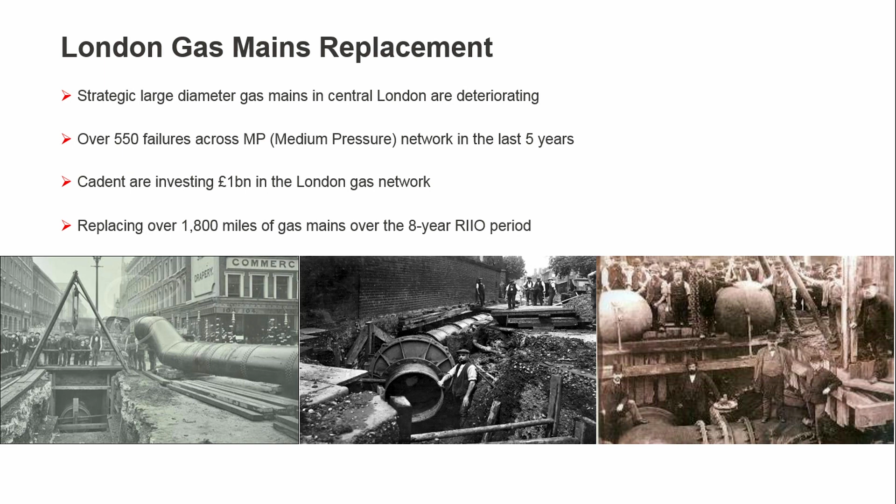A big part of Cadent's programme for the London mains replacement is the London MP Strategy, which is to replace the strategic gas mains running around Westminster, Kensington and Chelsea, to create a ring main from Fulham up to Hyde Park, back through Knightsbridge. We're also reinforcing the network south of the river, around Battersea and Vauxhall. We've replaced a lot of mains in the City of London and out towards Tower Hamlets along Commercial Road, all very heavily congested, high traffic areas, lots of disruption. It's really difficult work to do.

So why do we need a tunnel under the Thames? Cadent's got a small section of its gas network south of the river, a legacy hangover from when National Grid split up the networks and sold off to Southern Gas Networks, Northern Gas Networks and so on. We're reinforcing the network to facilitate the growth, regeneration and demand south of the river around Battersea and Nine Elms, where there's billions and billions of regeneration going on. Battersea Power Station, US Embassy, lots of residential, commercial, retail development going on south of the river, and they need more gas. The infrastructure there can't cope at present, so Cadent has an obligation to reinforce the network.

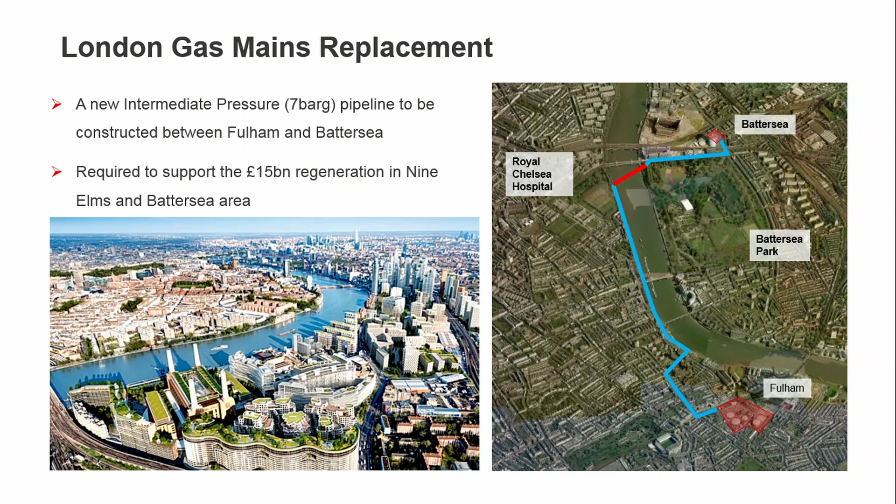So we undertook a study and identified that we couldn't get north to south river with the existing pipes that we had in place. There's an existing bridge crossing, Grosvenor Bridge, adjacent to Chelsea Bridge, which we see here.

Let's see if we get this to work here. So this is Chelsea Bridge. And this is Grosvenor Bridge, which carries all of the southbound traffic out of Victoria Station, a very busy railway bridge. Anyone who knows working on Network Rail infrastructure knows it's an absolute nightmare to get possessions and all that kind of thing. So to undertake any gas work on a Network Rail site, so to speak, was out of the question.

That was discounted. We also looked at the possibility of utilising other existing bridges, but as you can see here, they're all Grade 2 listed structures, and the local authorities wouldn't permit new infrastructure going on their assets. We also determined as part of the feasibility study there were some old steam tunnels north to south of the river going to Battersea Power Station, but we couldn't guarantee the integrity and condition of those tunnels, so we looked away from those as well. So we can't go over, that means we've got to go under.

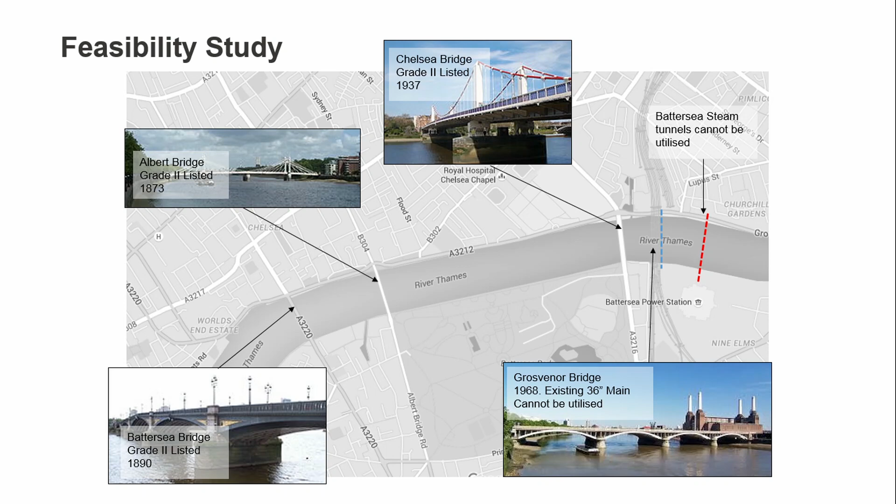Jacobs were commissioned back in 2012 to look at a route corridor analysis between Fulham, where the high pressure gas comes into this part of the network, and Battersea, which is where ultimately we need to get the gas to. The route corridor analysis identified a few potential options. It also identified Thames Tideway, which was obviously a big project that was planned, and it also identified Crossrail 2 potential, which had a safeguarded corridor there that we had to consider as part of our works.

From this feasibility study, we honed it down into 3 preferred options. I'll just talk you through these in a little bit more detail.

Option A runs from Chelsea Embankment Gardens through to Carriage Drive North in Battersea Park. The site on the north at Chelsea Embankment Gardens is a very slim, tight site, right next to Chelsea Embankment, a TfL strategic road with lots of traffic, and difficulties with access and egress into site. Carriage Drive North is smack bang in the middle of Battersea Park. So wherever we came out of the tunnel, we'd have to do an open cut trench to Queenstown Road, which is the road that you see here. Again, open cut for a large diameter main through a well-established, Grade 2 listed park wouldn't have gone down very well.

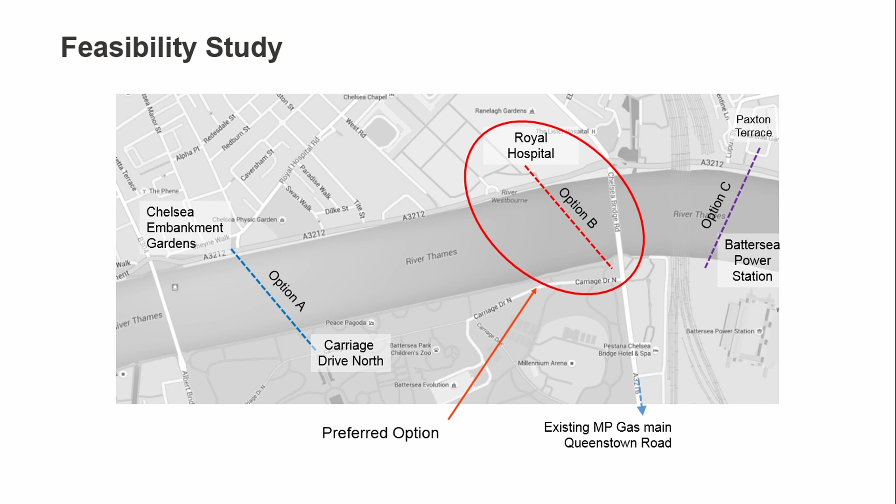If we look at this in a little more detail, it's been superimposed onto Google Maps, so you can see the general environment. We've got Chelsea Bridge here in the middle, and the alignment of the tunnel going north to south.

You'll see further on in the presentation that some of the site constraints, particularly around Battersea Park, were quite challenging, which we needed to overcome. And the Royal Chelsea Hospital, as I've said, hosts a national institution, the Chelsea Flower Show, which has been going on for over 100 years. The monarch attends every year, so factors like this we need to consider as part of the project.

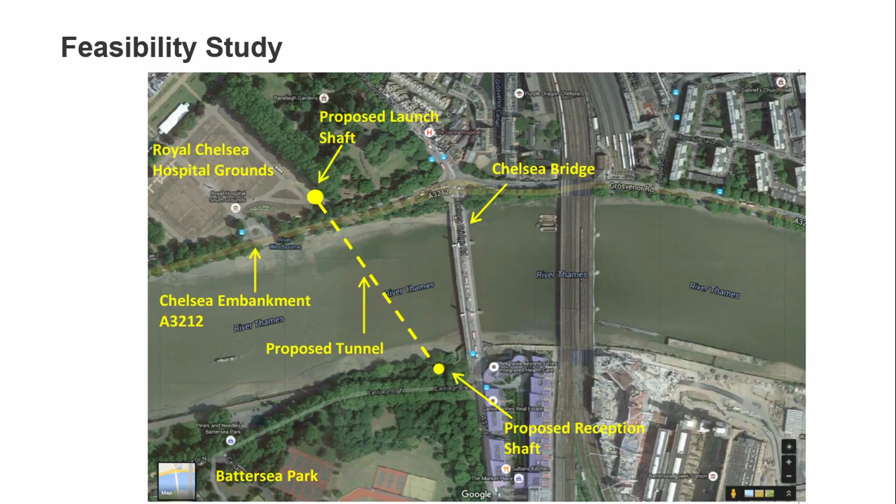In terms of team structure, Cadent and Trio have an 8-year partnership in place, but Trio replace gas mains and don't have capability within their core business to undertake heavy civil engineering projects. So Trio went back into the parent company, Skanska Civil Engineering, and we brought on board the project team, as you see here.

Mott MacDonald undertook all the design from tunnelling, civil engineering, and gas infrastructure. Skanska managed the shafts and tunnel construction with Barhale, and also managed all the site welfare, traffic, etc. Barhale were appointed directly to Trio as the pipeline contractor as well.

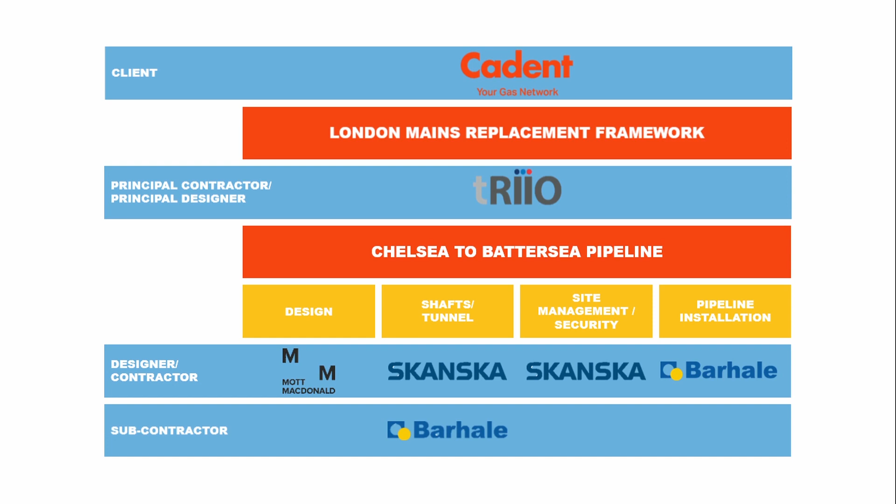Looking at things from a desktop feasibility study is great, but when you have to actually go out there and start speaking to the stakeholders and say, well, we want to come and do a dirty great big project in your nice manicured gardens, there's obviously some challenges around that.

For this project, there was significant stakeholder management, numerous consents and permissions to secure, a big interface with Thames Tideway and the Chelsea foreshore, and programme constraints. The condition from the Royal Hospital and the Chelsea pensioners was: okay, fine, you can come and do your work, but by no means can you affect the Chelsea Flower Show or the preceding events that happen over the summer. So these are the kind of things we had to factor into our project.

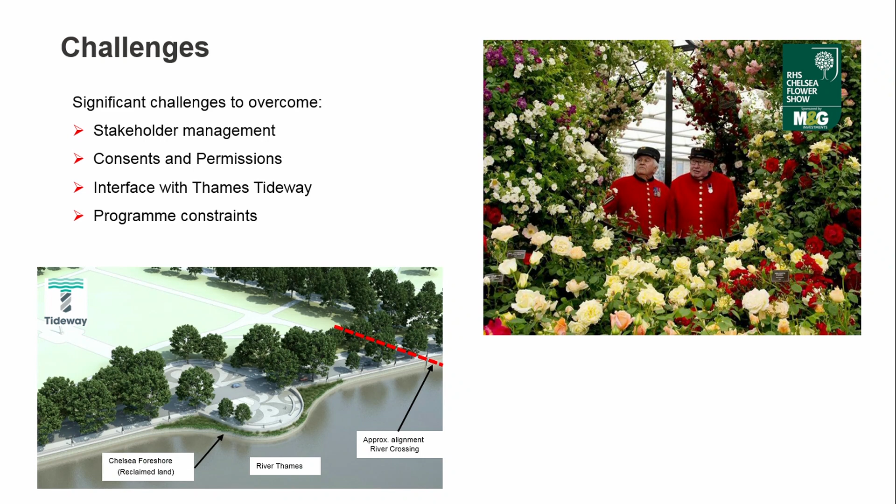They understood the drivers for the project, why we needed to reinforce the Central London gas network, secure infrastructure and gas supplies for Londoners for the 21st century, and through developing relationships with those stakeholders, we managed to get them on side for what is quite a challenging engineering project.

The RHS, to be honest, got quite concerned about the fact that we wanted to undertake major engineering works in the grounds of the Royal Chelsea Hospital. So they were quite a big stakeholder that we needed to manage carefully.

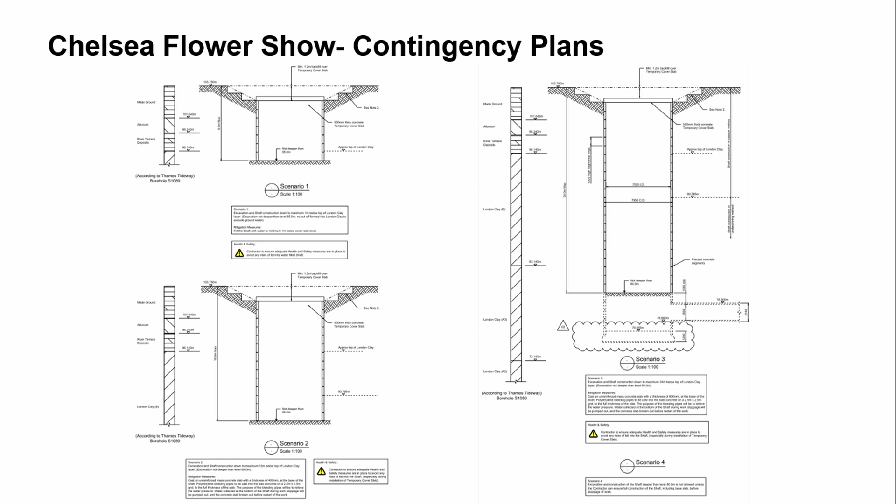Another big interface we had was with Thames Tideway. Obviously a big, major £4.2 billion infrastructure project with a development consent order and a safeguarded corridor down the centre line of the River Thames. Cadent had to agree through what they call the guidelines for developers process. Tideway requires anyone wanting to build next to or near their infrastructure to go through quite a rigorous process where we provide all our settlement information, which we'll talk about in a little while.

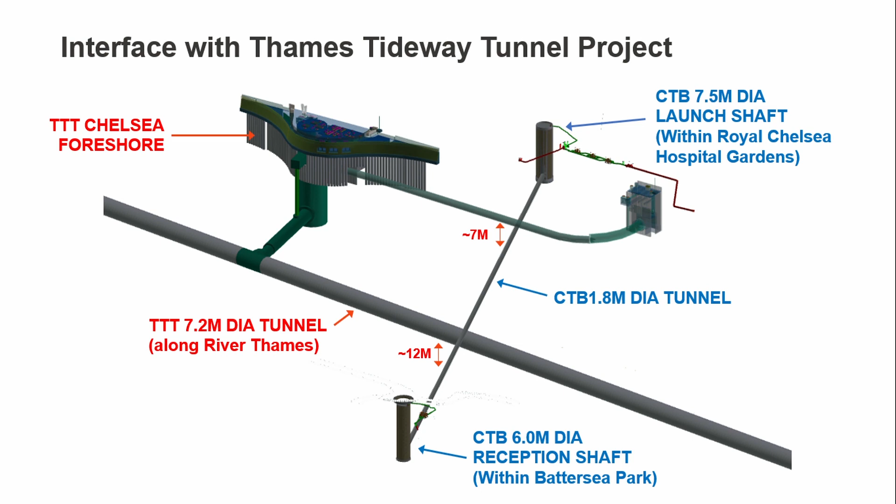Another benefit of coordination with Thames Tideway is the fact that we got to utilise their ground investigation information. So we had a massive programme and commercial saving in that we didn't have to mobilise our own GI barges in the river and so on to undertake boreholes which fed into our design. And as luck would have it, S1089 is bang where our shaft was going to be.

And the finalised layout we have here: 30-metre deep shafts, a launch shaft which is 7.5 metres diameter, a 6-metre diameter reception shaft in Battersea Park, and the pipe jack itself is 330 metres long, 1.8 metres diameter.

At the time of feasibility, we weren't sure whether or not we could get land agreed on the south of the river for some gas infrastructure. So the tunnel was actually sized to accommodate 2 gas pipelines, which is why it's so big compared to the 18-inch pipeline that was eventually installed - it was kind of over-designed for what we needed. And when we actually got permission that we could get the land, it was kind of past the point of no return in terms of the design, so we kept it at 1.8 metres diameter.

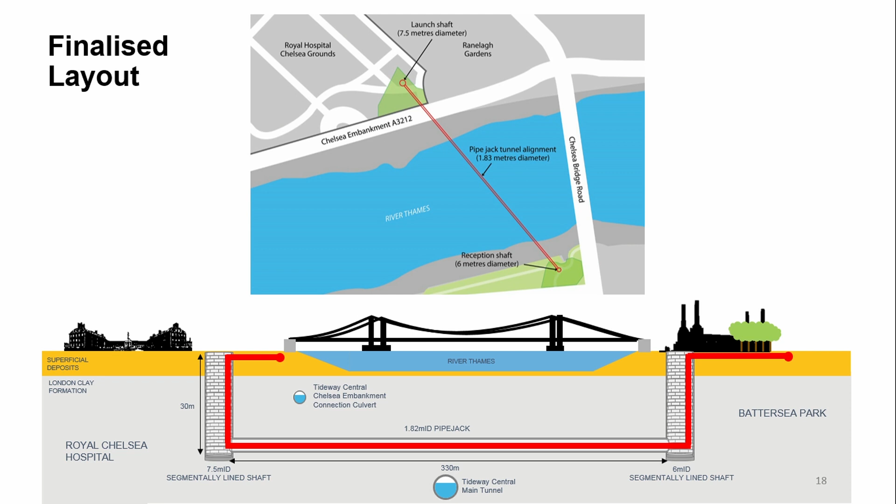And that's my first part over. I'll now hand you over to Nick to carry on.

Thanks, Andy. My name is Nick McCrossan, and I actually work for Mott MacDonald, but last year, in 2017, I went to the dark side and joined Trio, who are the principal contractors for the project. Over the next 10-15 minutes, I'm just going to take you through what made this project much more complicated than a normal pipe jacking project.

It was the constraints on both sides of the river which added to the complexity of the project. As Andy said, the works occupy either side of the River Thames, just north of Chelsea Bridge. We're in the grounds of the Royal Chelsea Hospital, and in the north-eastern portion of Battersea Park.

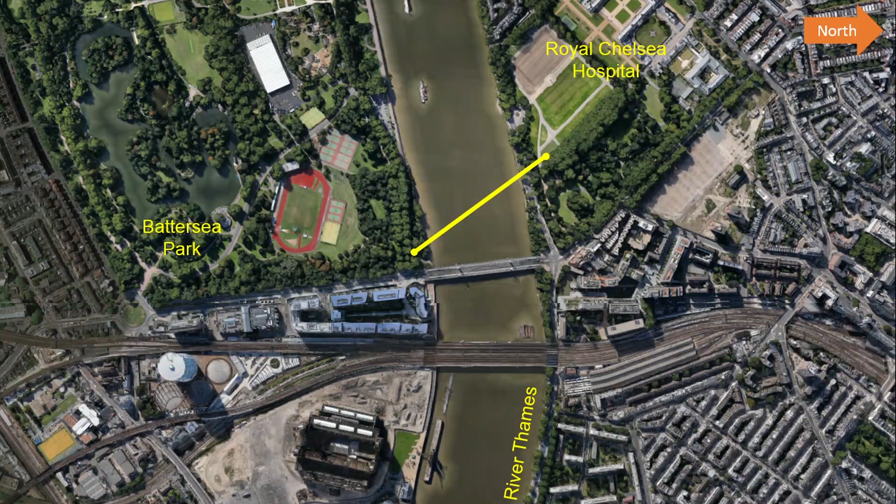So it might not seem like the busiest place in central London, but the amount of additional development work going on in this area is quite staggering, because you've got Battersea Power Station development to the east of our site, but you've also got the Northern Line extension feeding into that. You've got the Chelsea Barracks development happening north of the river, and you've also got the Thames Tideway development, as Andy mentioned too. In quite a small constrained area, you've got quite a lot of development, which obviously puts a lot of strain on the local transport network and the supply of resources and materials. So all these simultaneous and competing projects make things a little bit more difficult for us.

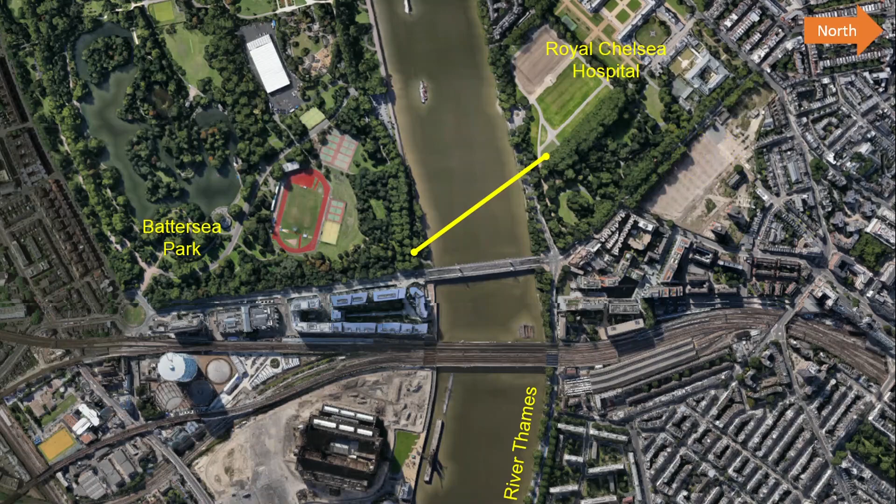So focusing purely on the Royal Chelsea Hospital site, which was our launch shaft, I'll go through some of the constraints. So the biggest one is you've got Tideway.

They're building an offline shaft just adjacent to the Bull Ring Gate at the Royal Chelsea Hospital, and they've also got an interception tunnel running from the Ranelagh Gardens into the shaft. So we had to coordinate all our works with them when they started on site last year.

You've got the TfL Red Route on the Chelsea Embankment, one of the major transport veins of London, which tends to get quite congested, making it difficult to get materials in and out.

We've got 2 key Thames Water assets running underneath the site, the Ranelagh sewers. For the duration of the works, we had to make sure these were protected, and we were measuring any kind of impact to them, which I think Verushka is going to go through in her section.

The hospital itself is a care and retirement home for over 300 ex-military personnel. So obviously we have to be very cognizant of the impacts that we have on them as a community. Especially when we went to 24-hour working for the tunnelling portion, we had to make sure we were minimising any visual and noise impacts as a result of our works.

And the grounds, as Andy stated, during the summer are quite busy with events such as the Royal Chelsea Flower Show, but also host things like the Masterpiece London Art Fair, and the Longines Global Champions Tour.

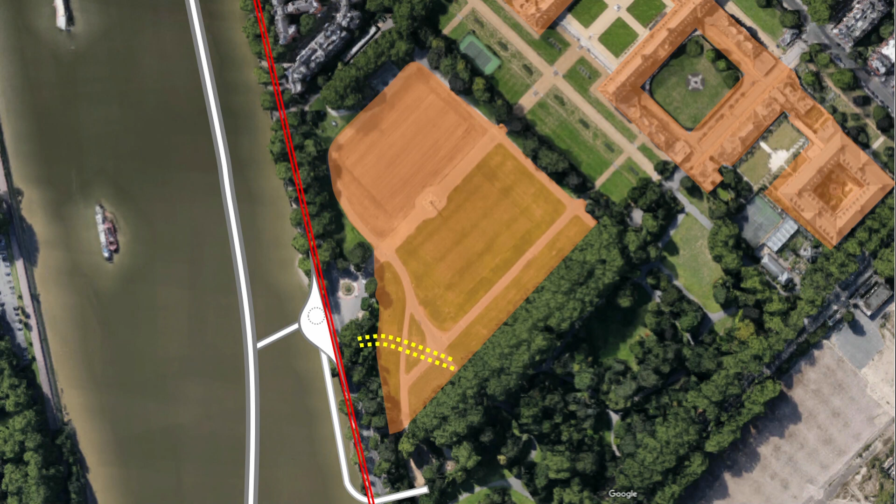What was actually quite a pleasant surprise was you would think that the hospital at our level would be quite stuffy and wouldn't be very flexible, but they were absolutely fantastic, and the residents themselves were very interested in what was going on, because you had ex-miners and ex-engineers who wanted to come down and offer advice and see behind the hoardings, and it was really good to actually get them out onto the site to see the works going on.

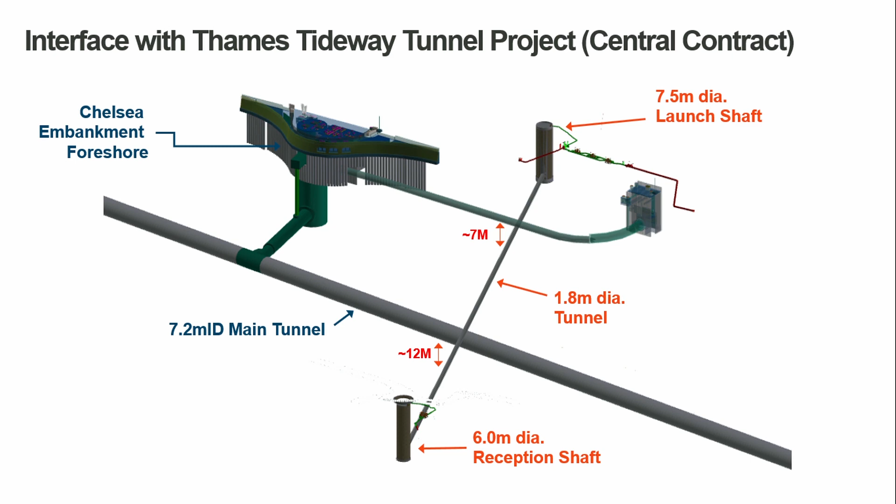As Andy mentioned, our biggest interface was with Thames Tideway Tunnel, so what was quite important is you don't compete with another project, you have to help each other deliver it. We had to make certain accommodations in the work we were carrying out at Chelsea to make sure that Tideway could complete their programme of works as well. That was one of our major considerations.

Taking account of the summer events had a major impact on our programme. For about 5 months of the year, Chelsea was out of bounds, we couldn't carry out any work. So we had a very short window in which we were able to construct a launch shaft.

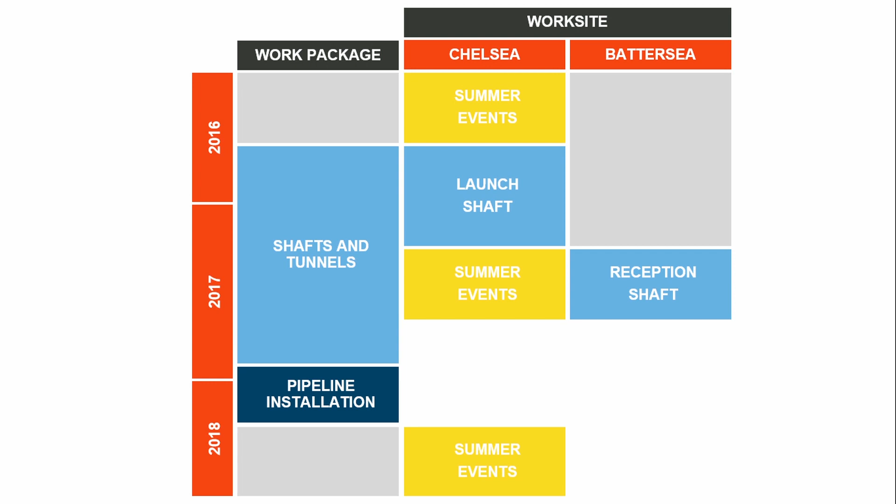Then in the 2017 summer events, we had to go over to the other side of the river, mobilise, build a reception shaft, and then we had a very small window last winter in which we could start the tunnelling and get the pipeline installed and tested and commissioned. So it's quite an intense and constrained programme we had to work to.

So we had to go from here, a fully mobilised site at Royal Chelsea Hospital with our cabins, our exposed shaft, all our plant materials, to a state where it was fit to hand over to the hospital for their summer events. So we installed a prefabricated cover slab made up of 12 planks, covered it over, backfilled the shaft and the ground and handed it over to the hospital.

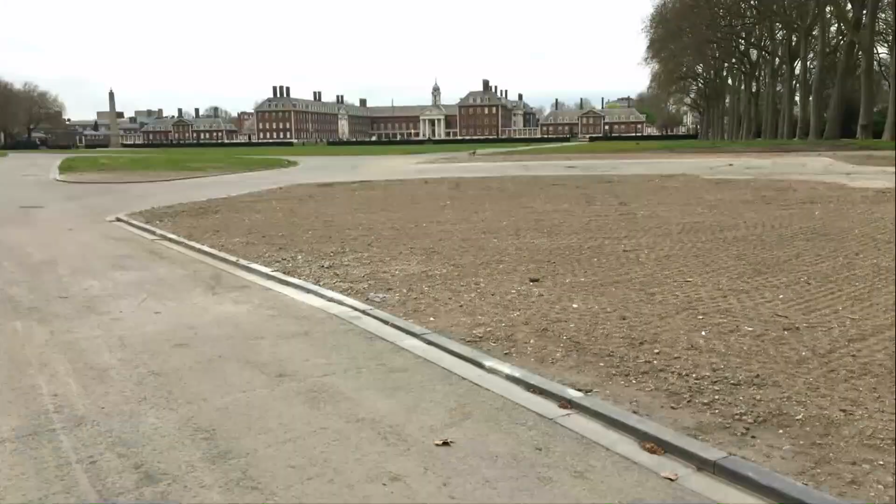And I know what you're thinking, you think that looks absolutely horrible, you see you've decimated the Royal Hospital's grounds. But what's quite interesting is after the end of the flower show, that's the state the hospital is left in - there's not a blade of grass to be seen when they leave. And the hospital has an incredible team of landscapers and gardeners, so they're able to, in the space of a matter of weeks, turn it from like a brownfield site to that.

Looking back into the history, the hospital was opened in 1692. For about 200 years before the Chelsea Embankment was built, the river used to go right up to the edge of the gardens, so you would have jetties and slipways available for marine transport to use as an entrance to the hospital.

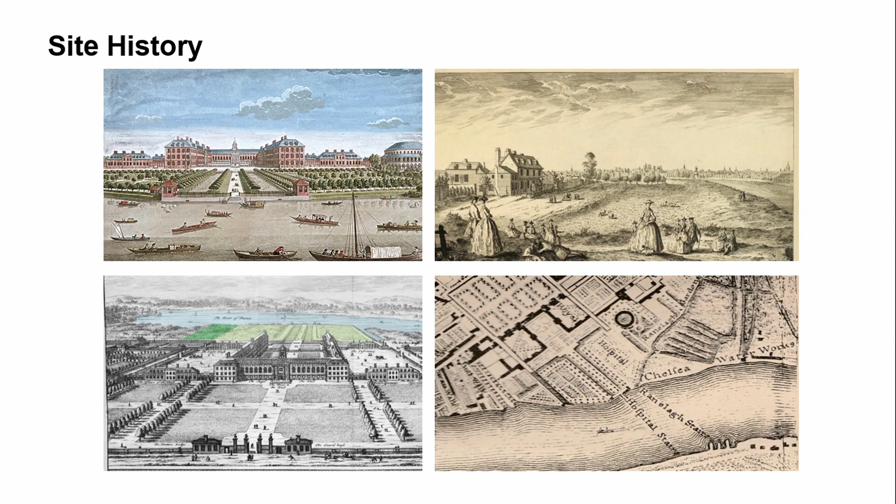In 1874, when the Chelsea Embankment was built, the gardens were extended and the jetties were lost, until on our 4th day of construction we managed to find one in the shaft. We found about 500 mil of a masonry jetty structure, supported by fantastic semicircular timber piles. We found about 14 of them in the footprint of the shaft, and they had these fantastic steel cutting edges on them.

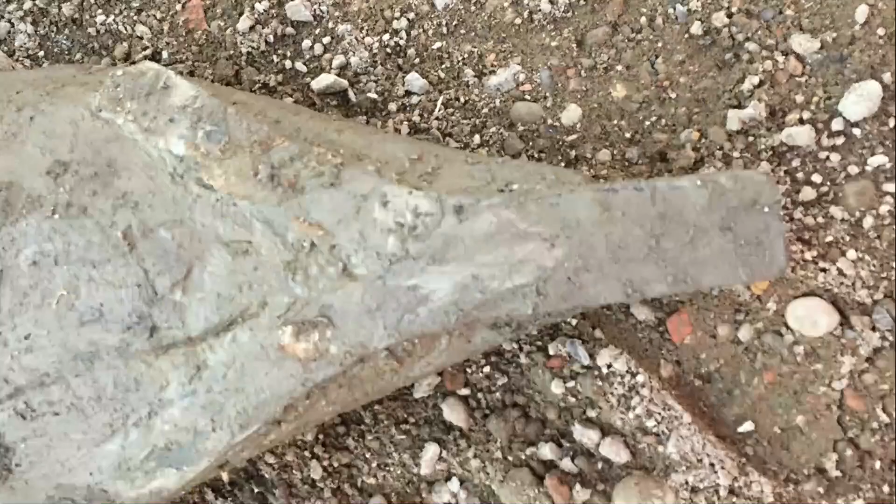You may not be able to see it for the mud, but these were left over from when the hospital was originally constructed as well.

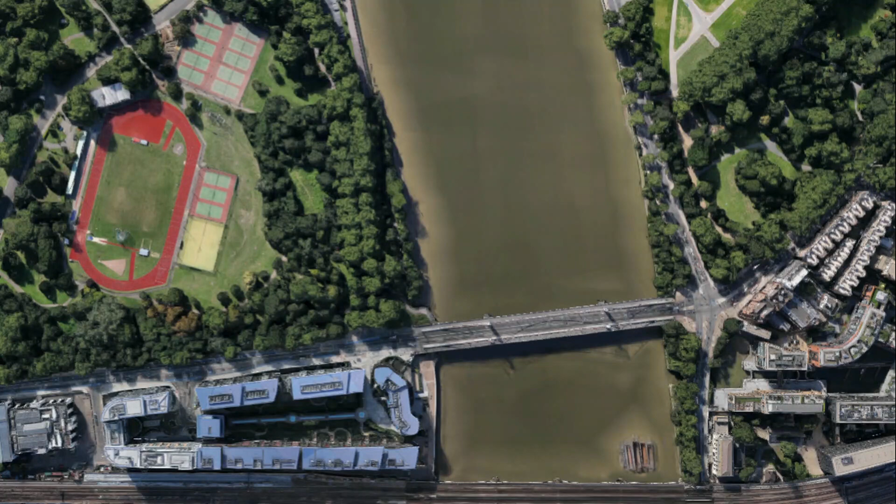Focusing over on the Battersea side, things were a bit more challenging. The site itself is located in the northeastern portion of the park. This isn't a Thames walkway, but it's a walkway required to get from the park into the Battersea Power Station development, and it had to remain open for the duration of the works.

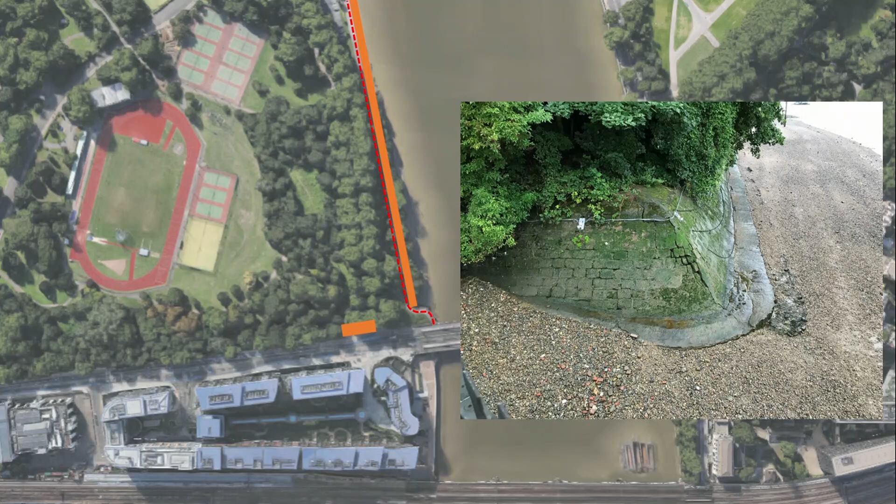As with anything in this area, everything seems to be Grade 2 listed, so we had these Grade 2 listed wrought iron and masonry gates through which all our construction traffic had to go - all our materials, all our concrete, everything had to come through these gates. We also had a river wall located just less than 10 metres away from our shaft, which was a major concern, and Vrishka's going to talk a bit more about how we managed it.

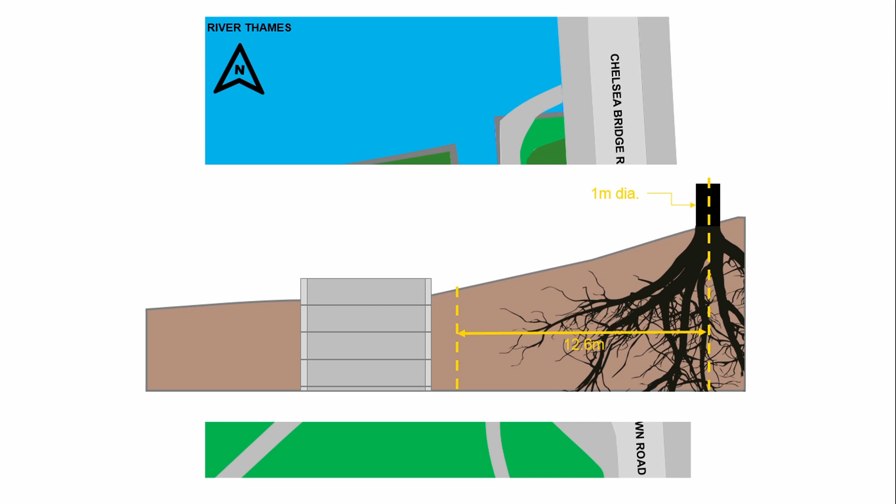On the site itself, the topography was quite variable, and as you can see, we had a tree causing us a little bit of bother - quite a considerable tree, about 1 metre in diameter, which forced us to place the shaft in the middle of the footpath.

It was very close to the river wall, and also quite close to where the footpath was running along the site. Due to the topography, we had about 1,100 square metres of site available to us, but due to all these constraints, we could only use about 44% of it.

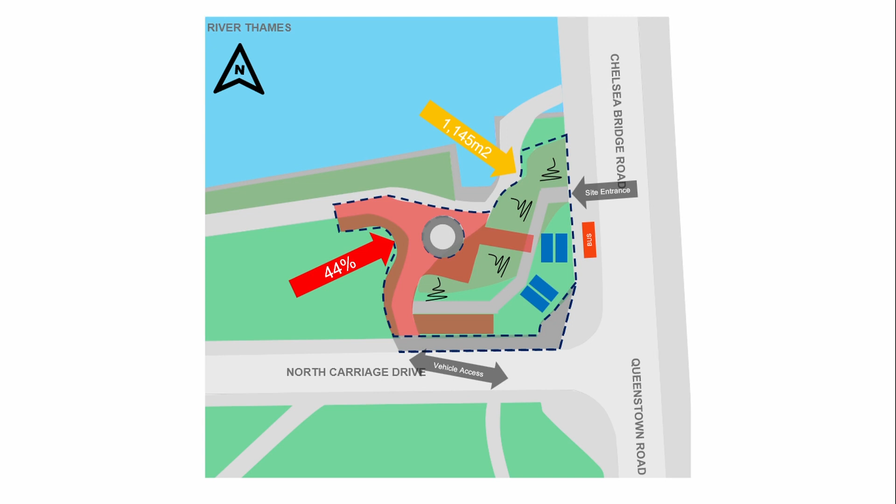The biggest constraints at this site were the removal and storage of muck. The progress of construction at Battersea was linked to how much material we could store on site and get away as quickly as possible. Also key was the storage of our segments and other materials for building the shaft, and plant movements moving in and out of the shaft in quite a busy pedestrian area. Our traffic movements were our biggest hazard on the site.

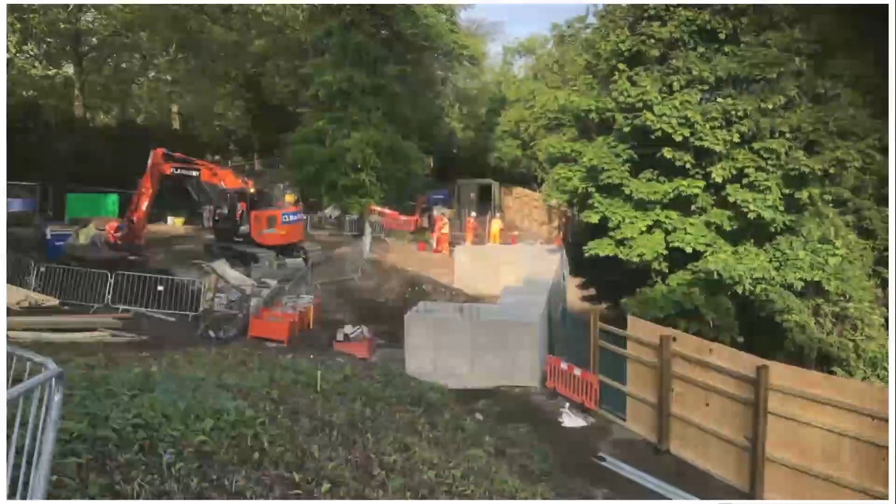You can see from left to right there's quite variable topography on the site, and I think Barhale did a fantastic job of creating a safe working environment. They cast this retaining wall to create a stable platform, while leaving enough space for the footpath to remain open for pedestrians and cyclists. It was backfilled, and they created safe working platforms for the plant, and also did a good job of not interfering with the tree canopies - so our friends at Battersea Park were quite happy about that.

And then we come to Amanda. Amanda was an Iseki Unclemole machine. Instead of going to local schools to name the TBM, we went to the Chelsea pensioners and opened up a ballot for them to name it, in recognition of some of the staff who work up at the hospital. The director of the infirmary, Amanda Lord, was chosen as the recipient, and I think it must be quite a surreal moment to be taken into a meeting room and told we're going to name a big dirty machine after you.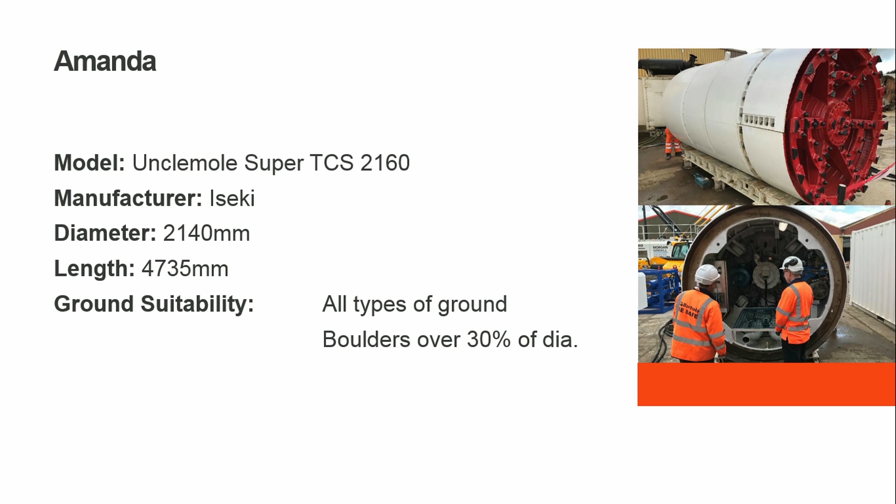We had a fantastic event on the 6th of October last year where we invited the Chelsea pensioners and the Friends of Battersea Park and a few other stakeholders to the site. It gave them an opportunity to learn about how we construct projects like this, ask questions, and see around the site and interact with the machine itself. It was also a great photo opportunity to get the Chelsea pensioners in their red jackets and PPE next to our machine.

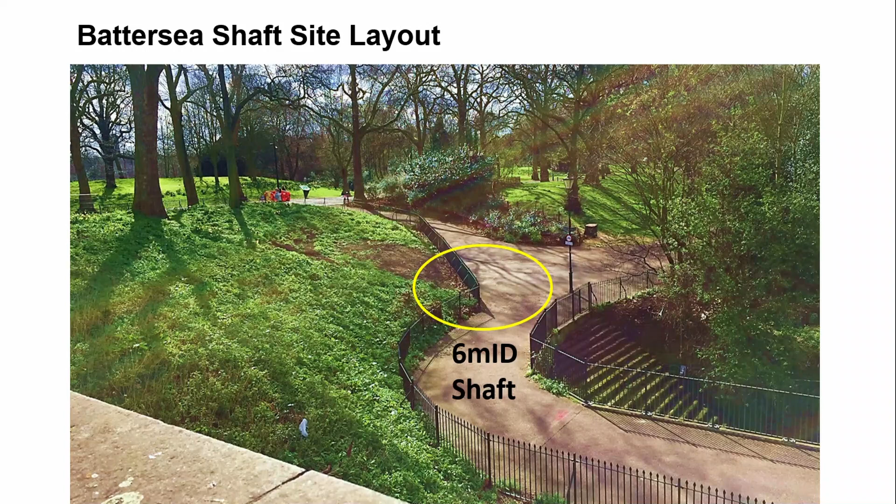At the launch site in Chelsea, the main constraint was that the works had to be delivered around the RHS Chelsea Flower Show, so we had to pick a method and plant that would enable us to mobilize and demobilize quickly to leave the place for the prestigious event. At Battersea, there was steep topography, a much smaller site area, proximity to Chelsea Bridge and the river wall, and mature trees on site. With this in mind, we had to reduce the size of the shaft to 6 meters, the smallest size to enable us to take the TBM out. We also had to integrate the construction of the collar and the working platform, while leaving a pedestrian footpath within that proximity.

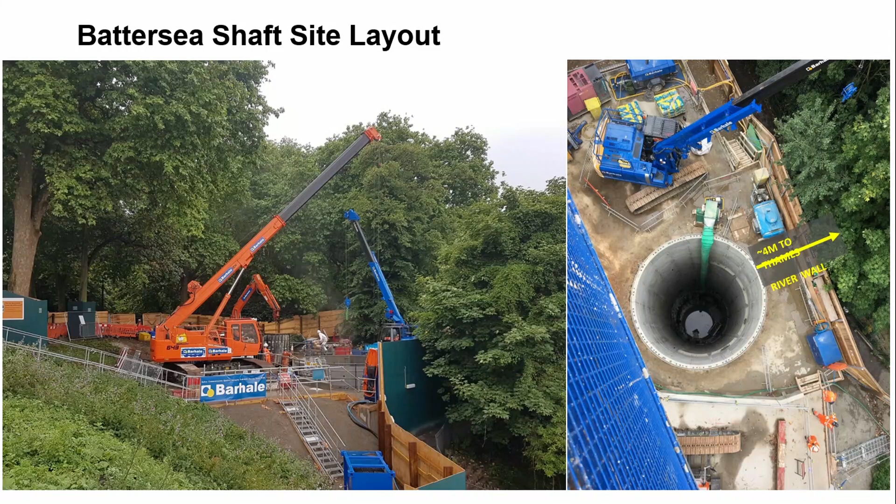In terms of geology, we had around 2 to 5 meters of made ground at the two shafts, underlaid by around 4 meters of water-bearing strata made of alluvium and River Thames deposits, which was underlaid by a 35-meter deep clay layer. So we needed to find a solution to construct the structure through the water-bearing layers and deep into the clay.

Given the constraints presented, we decided the best approach would be to construct using the caisson method through the water-bearing strata, then switch to the underpin method once we were in good clay. For the caisson shafts, they were built of segmental rings bolted on top and jacked with jacking gallows anchored into a collar. The structure was underlaid by a cutting edge, which sheared the ground and created a 50 millimeter annulus filled with lubricant. This lubricant maintained active pressure on the excavation face and also reduced skin friction.

Once the structure was down into clay, we pumped the water out because this structure was built submerged. Once we pumped the water out, we replaced the lubricant with grout, and used a special ring to enable us to transition from the caisson method to the underpin method.

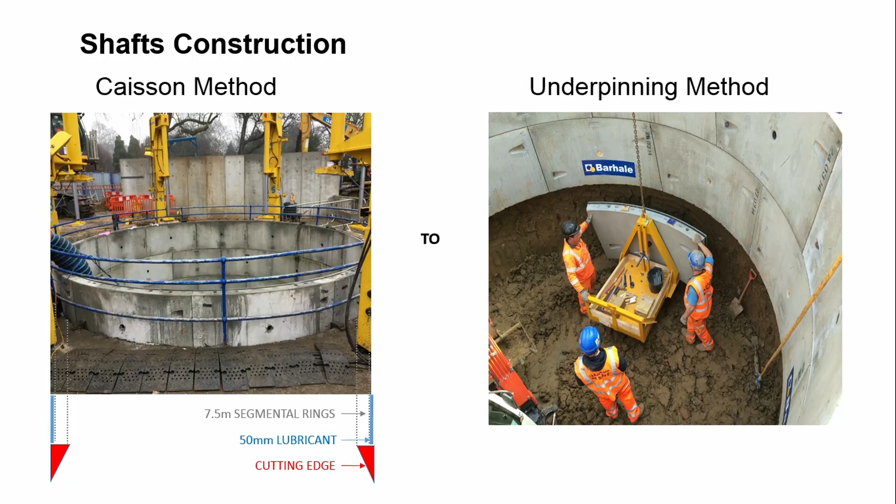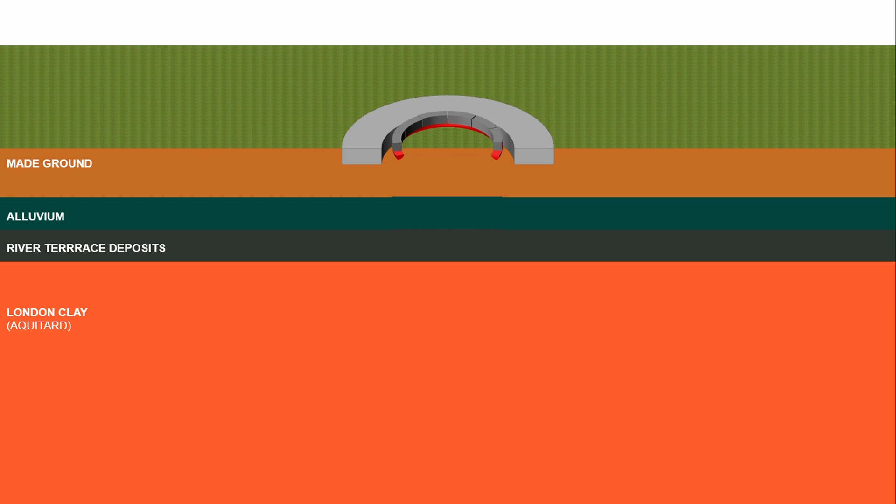A short animation shows how we built the shaft. We built a cutting edge, a choker ring on top, and then the collar was constructed with a 50 millimeter space between the collar and the structure, used for inserting lubrication and also for controlling structure verticality by introducing steel shims. Together with the jacking gallows, we managed to construct the shaft on a vertical trajectory. That's how we built the shaft, caisson, adding more rings on top, going through the water layers. Once in clay, we pumped the water out and replaced the cutting edge.

We built the underpin by excavating 1.2 meter advances. Then a ring was placed and grouted, and we finished at formation by constructing an under-ring base, which together with bolting the collar to the shaft, enabled us to balance the buoyancy of the structure.

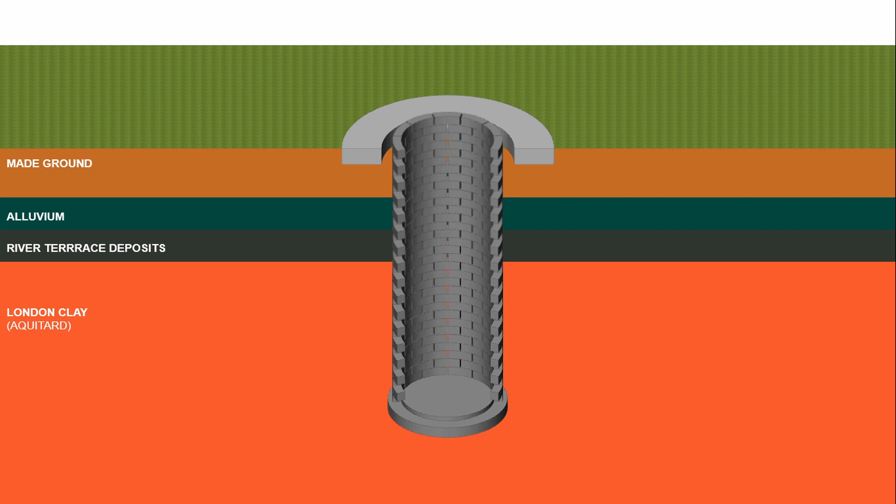It's quite difficult to grout caisson shafts properly. In addition to traditional methods using pressure gauges mounted on the grout lines, we used a thermal imaging camera, which enabled us to control where we put in grout and treat sections of the shaft that showed no grout present. With this, we managed to control the settlement within the predicted values.

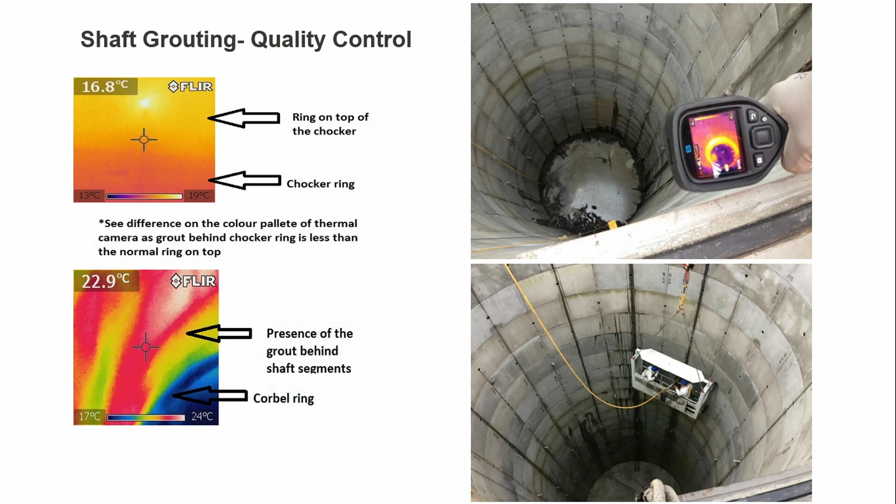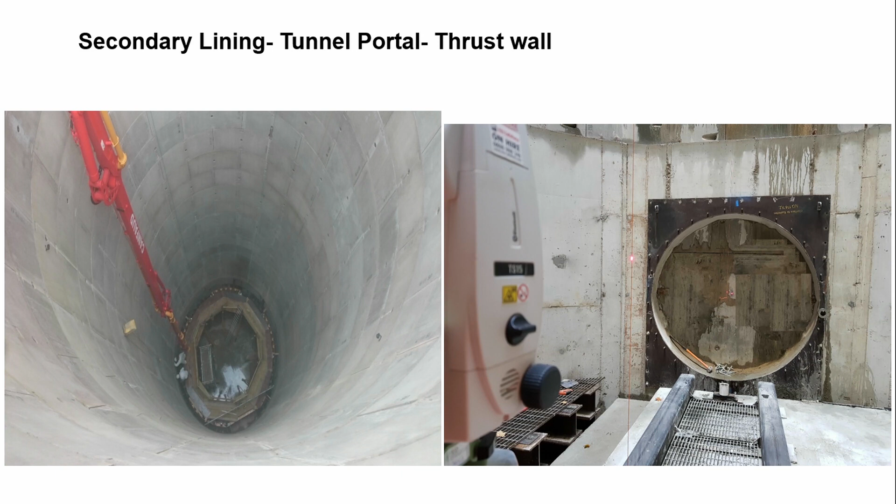Due to the depth of the structure, which is 30 meters deep, we had to strengthen the segmental liner and build a secondary lining. But before doing that, we thought we needed to do some tunneling works as well, enabling us to build a portal and a thrust wall. So we optimized the design and constructed all the structure in one, which we did, and this saved us some of the program.

We measured the construction rate for the tunnel and for the shafts, and established that the underpin method was slightly faster, which we kind of knew, and that was one of the reasons why we chose to switch to this method.

However, it's heavily reliant on good ground conditions and results in slightly more settlement. One of the other advantages of the caisson shaft was that most of the structure was built at ground level without people having to work in confined space, so the structure jacked down.

The second part of my presentation will be around the tunnel construction. The corridor available to us, located between the existing structure and the Thames Tideway tunnels to be constructed, was in good clay, which was ideal for an open face TBM. However, drift hollows near Chelsea Bridge determined us to take a safer approach and go for a slurry TBM, closed face, called Iseki Unclemole.

This was able to deal with a range of ground conditions, also able to crush boulders up to 500 millimeters. The slurry was formed by mixing water into the ground by the rotary head, movement of the cutter head, and had both an effect on maintaining excavation face pressure and also conveying the tunnel arisings to the ground level where they were treated.

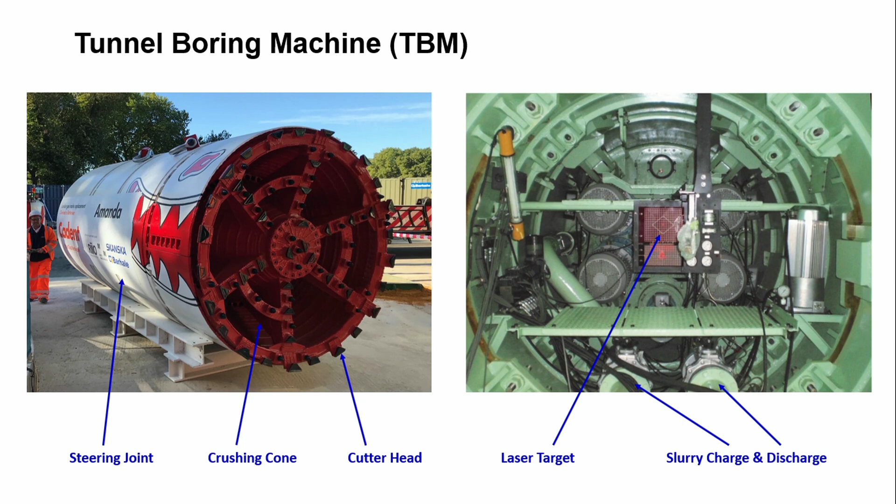We set up a flying factory at the drive shaft where all the tunnel services were pre-installed in the jacking pipes, which enabled us to reduce the work in confined space and increase the output of the tunnel construction. The lubrication was inserted in the overbreak through pipe outlets, which were uniformly distributed around the tunnel.

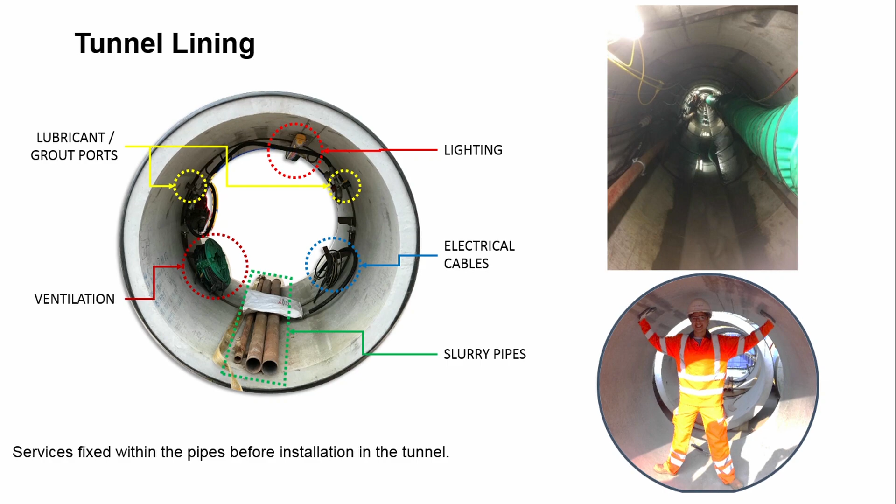The pit bottom at the launch shaft, 7.5 meters in size, was quite congested. All the pipes and operational valves had to be placed in such a way that we can operate them quite quickly.

We used a 600-ton jacking rig, and due to the space constraints, we had to use a jacking spacer, which enabled us to extend the stroke of this jacking rig and push the tunnel so that we can make room for another pipe. We used a gland plate, a composite between a steel plate and a rubber gasket, which enabled us to maintain the lubrication pressurized around the tunnel, hence reducing the friction.

One of the features of the microtunneling system we used was that it was largely automated. So the TBM driver and the team built the tunnel from ground level with little intervention in the confined space, such as adding a new pipe.

The controls of the TBM, all the indicators on the top side of the control panel, let the driver make adjustments in steering and slurry control, and then the lubrication control was displayed at the bottom of the control panel.

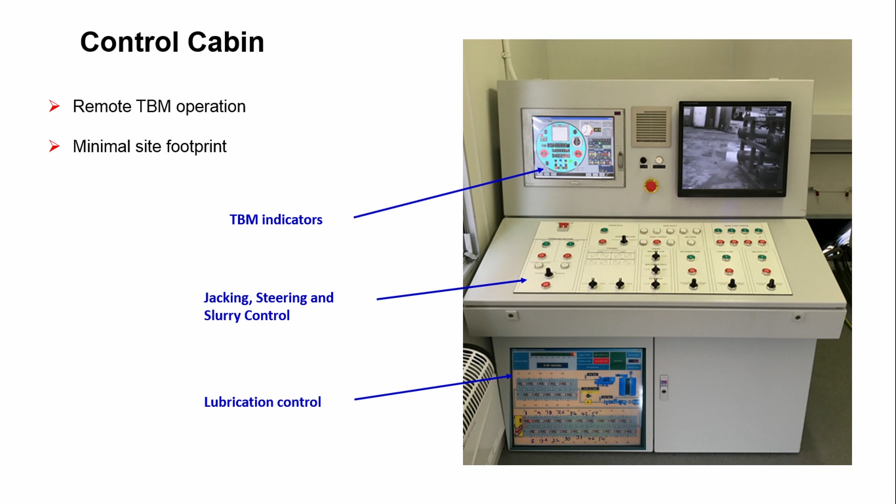Another quick animation about the pipe jack and how we did it, with the pipe lowering into the shaft, the pit bottom.

One of the problems we had was that the predicted total jacking load was around 1,200 tons, exceeding the capacity of both the thrust wall and the pipes. So we had to find a solution for how to distribute that load, and we introduced two interjacks, which enabled us to construct the tunnel.

The downside of introducing the interjack is that it increases the construction time of the tunnel, and it's going to have an effect on the total jacking load ultimately.

We monitored the jacking forces, and we knew that the jacking load would increase with the tunnel length and with time. Lubrication was key to ensure that the clay distension is retarded, resulting in less friction and less thrust required. The thrust wall load, shown in the blue line, was measured versus the predicted load, and as a result of this good lubrication, the jacking force was less than predicted.

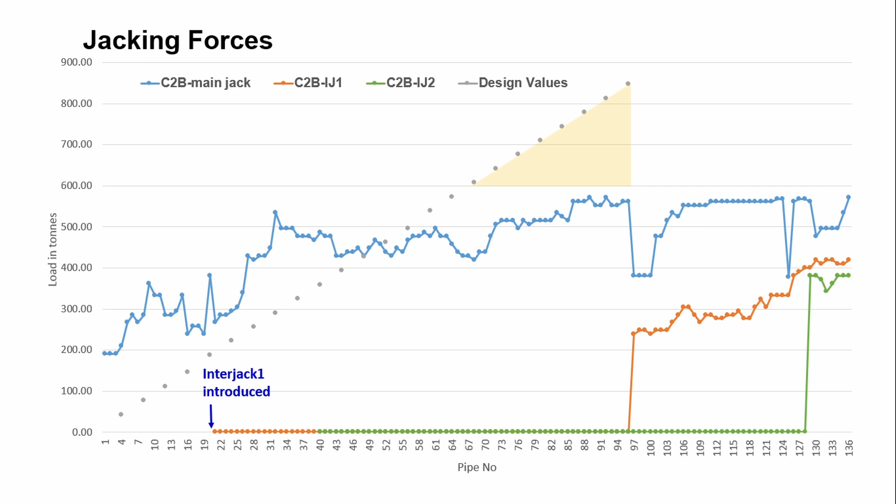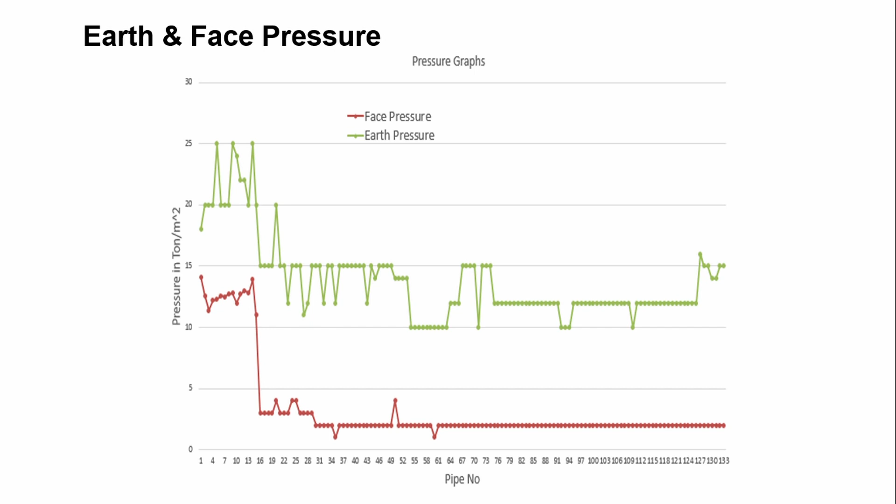This enabled us to utilize the interjack later - interjack 1, introduced at pipe 20, was not required until pipe 97, which had quite a good effect on the tunnel output. We monitored the earth and face pressure, establishing a high value as we left the drive shaft, and lower earth pressure underneath the River Thames.

In terms of slurry separation plant, it's an important process associated with the use of slurry. TBM is the means by which the slurry is produced, treated, and managed. The slurry processing rate is instrumental to the tunnel output and also to the waste volume. The separation plant is configured by the size of the tunnel and the ground expected.

So we had the GBR information. We took some additional samples at the tunnel horizon to enable us to consolidate that GBR information, and to fine-tune the plant and the polymers that we're going to use to separate the slurry.

How does it work? The dirty water coming from the TBM goes to a clay ball pod where particles above 20 millimeters are segregated out. Then the slurry travels down to a de-sanding unit, removing 6 millimeter particles through shaking beds, and then through conical shape hydrocyclones where the centripetal force removes the solids to one side, and the slurry goes down to the dirty water tank. The last process is in the centrifuge, where we added a flocculant to enable all the suspended solids to attract, forming clusters, which were spun by a fast motor, and particles removed out, and then the clean water was pushed back into the TBM.

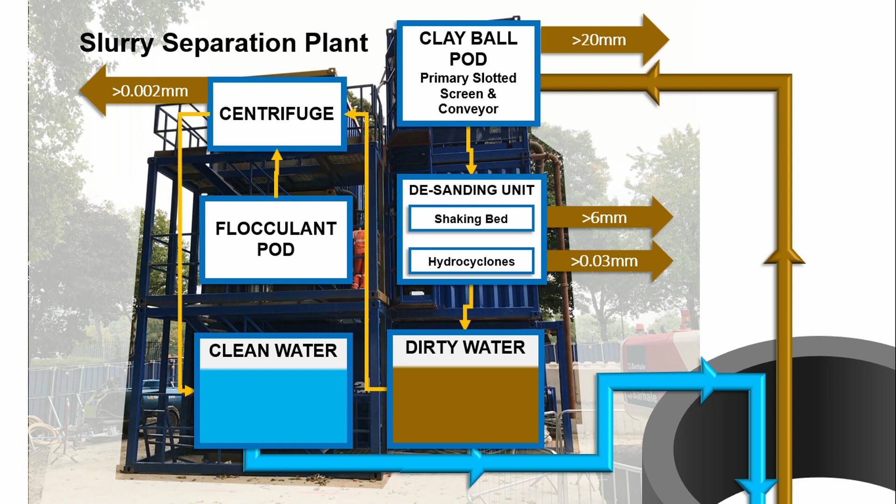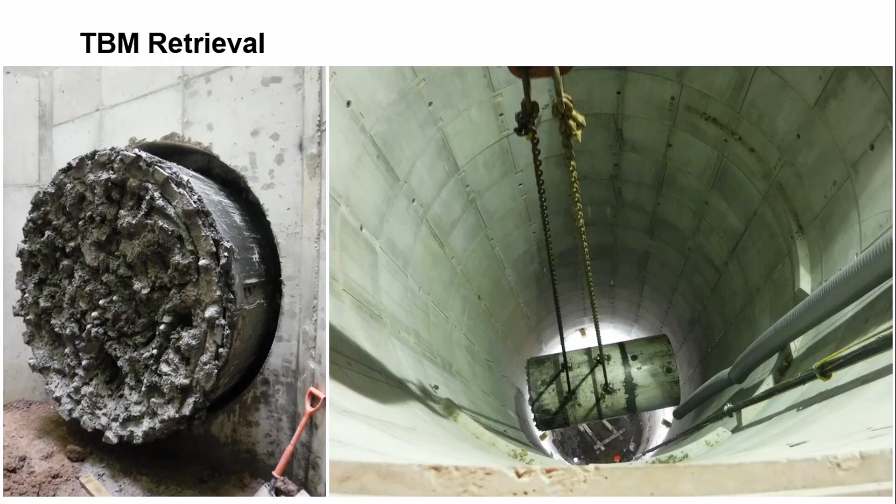After 330 meters and some fine engineering, the TBM was retrieved within the portal tolerance, despite engineers saying that it's too small. So in conclusion, we installed the pipeline after the construction of the tunnel and the shafts, and the whole project was recognized for minimum disturbance. Key was the fact that we automated quite a lot of the process, trying to work less in confined spaces, and lubrication and slurry was key in achieving 330 meters in 24 days.

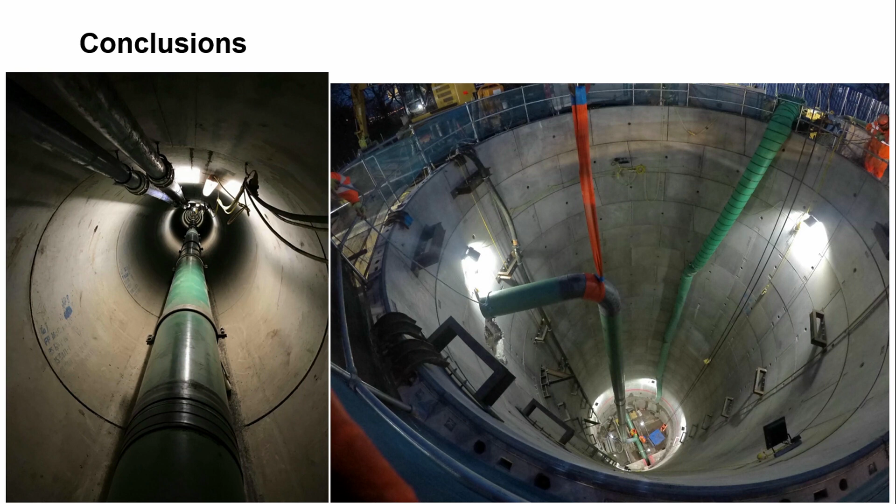Okay, my name is Verushka Ortiz. You did a very good job with my name, it's not easy. And I was involved in the estimation of the settlements and the impact assessment.

Because this project was carried out in an urban area, we had to ensure that third-party assets were not going to be affected by the construction works. And therefore, we had to carry out an impact assessment.

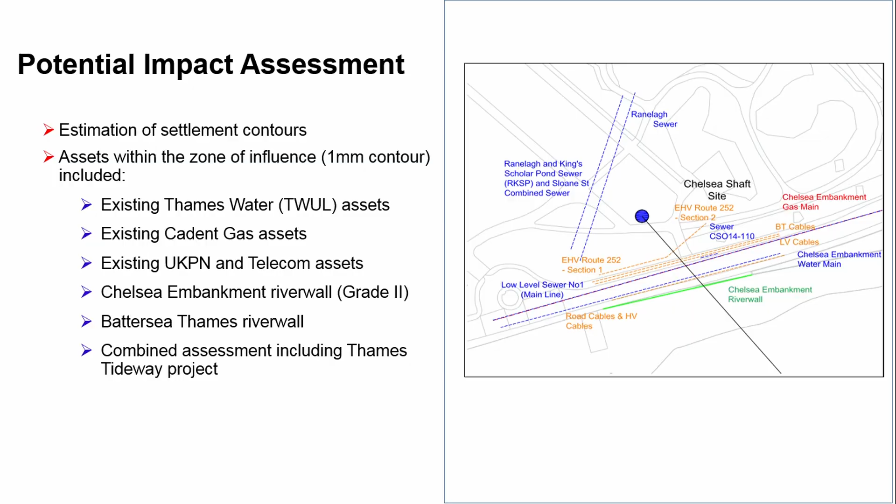We had the Chelsea Embankment river wall here, which is a grade 2 structure. We also had some assets that we had to pay particular attention to, like the Ranelagh sewer, which is a Victorian brick sewer. And also, as it's been mentioned, the Thames Tideway Central project, and for this one, because of the interaction of our projects, we had to carry out a separate impact assessment, accounting for the combined effect of both projects.

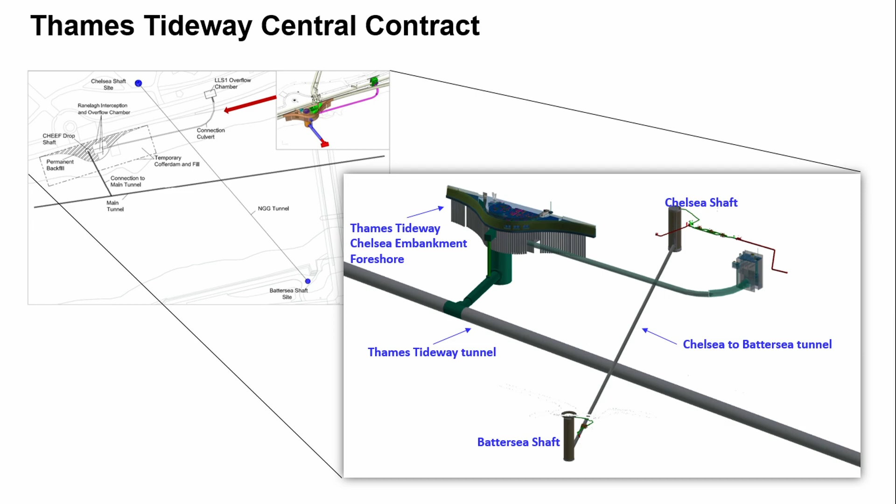We also had to pay particular attention to the Battersea River Wall, which after the condition survey, was classified as grade 4 under the environmental agency rating, which essentially says that the river wall was in poor condition. We found cracks from 5 millimeters to 15 millimeters. There were some blocks missing, so it was in poor condition.

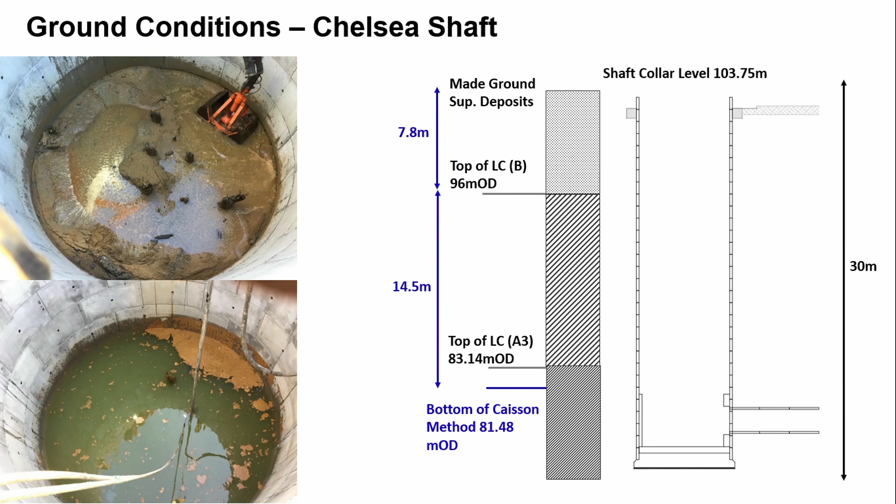The ground conditions were typical of London geology: made ground, overlying alluvium, overlying river terrace deposits, overlying London clay. We found groundwater in the superficial deposits, but dewatering was not required for our project. The top of the London clay here was found around 8 meters below ground level.

I just want to stress that during the construction, we tried to use as much caisson excavation as we could. For the Chelsea shaft in this area, we excavated around 22 meters by caisson. And then when we arrived at the top of the London clay A3, which is a stiffer material, we changed to underpinning.

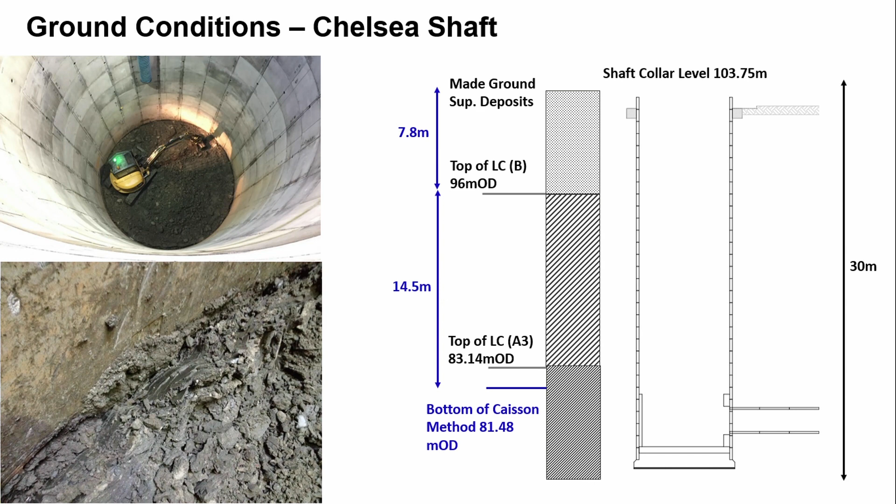In the Battersea shaft, it was similar ground conditions, just that in this case the superficials were a bit thicker, so there were about 13.5 meters. In this case, the caisson was used until around 17 to 18 meters. Some particularities of this job is that during the excavation in London clay, we found big claystones of up to 500 millimeters.

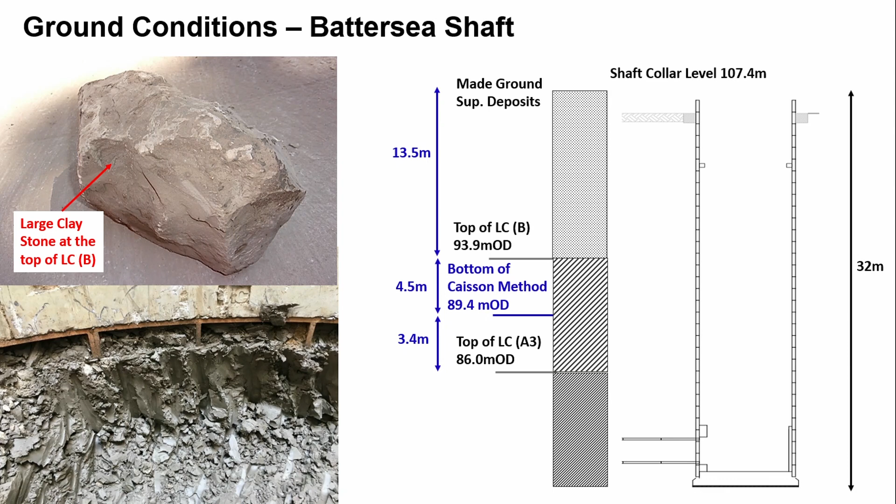So this was something that was also picked during the GBR. We found really big claystones here.

For the impact assessment, how do we estimate our settlements? How do we get our expected settlements? At the moment, the methodologies to estimate settlements are empirical, meaning that data from these projects is still feeding these methodologies. In the case of shafts, we use the methodology of New and Bowers from 1994.

Let's say this is our shaft. This methodology suggests that the settlements around the shaft will follow a parabolic envelope, and the maximum settlement will be related to the depth of the excavation. According to New and Bowers, our maximum settlements are going to be around 0.06%. Regarding the width of the zone of influence, New and Bowers suggests that it's going to be equal to the depth of the shaft. We can see here also a representation.

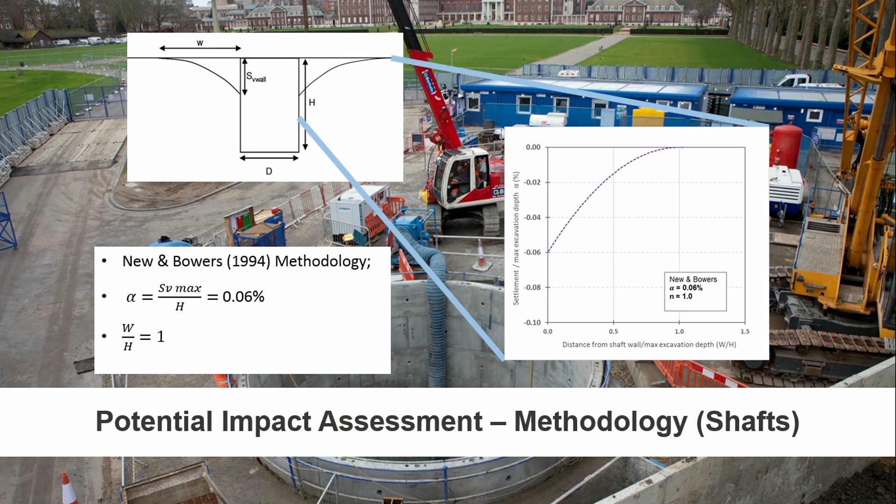In terms of tunneling, we assume an inverted Gaussian distribution. The maximum settlement here depends on the volume loss, but the volume loss also depends on the construction methodology. For the estimation of these settlements, it was particularly challenging to find volume losses for pipe jacking, and we found that there is not much data available. So we assumed a volume loss of 2% and a K value of 0.5, which is the coefficient that characterizes the width of the trough.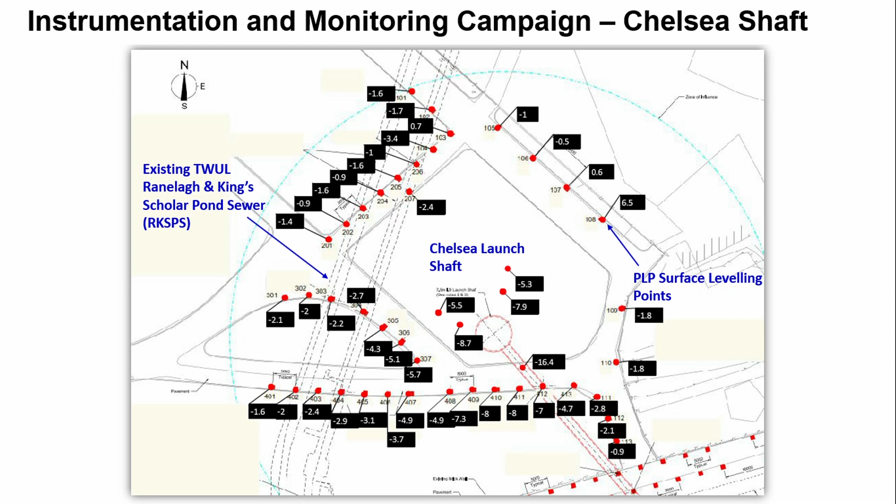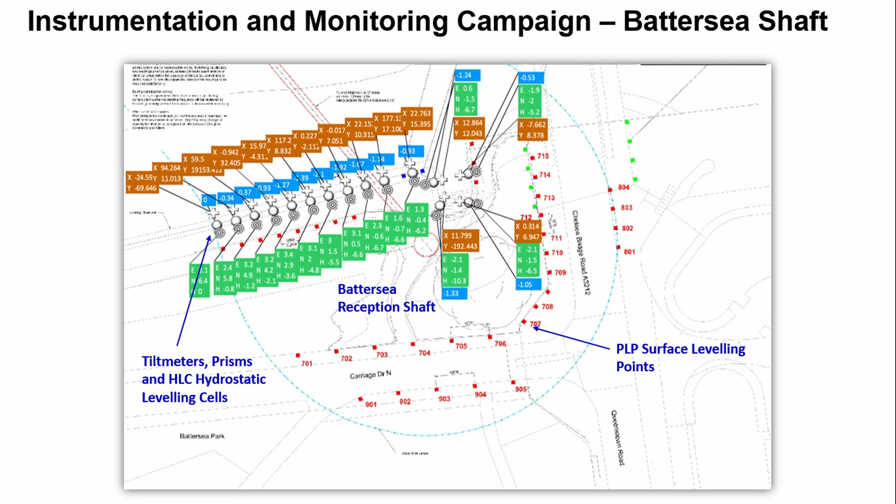Here is the Chelsea shaft, and this is the Battersea shaft. For the river walls, because they are sensitive structures, we had a dual system: an automated system based on tilt meters and hydrostatic leveling cells, supported by manual measurements with prisms. This also gave us a certain level of redundancy.

During the installation of our monitoring system, we had to be in close collaboration with Tideway Central because, as you can see in this picture, our instruments were right beside theirs. Additionally, we installed 9 monitoring manholes, 6 of them along the Chelsea Embankment, which also required close coordination and communication with TfL and with the Tideway Central Project.

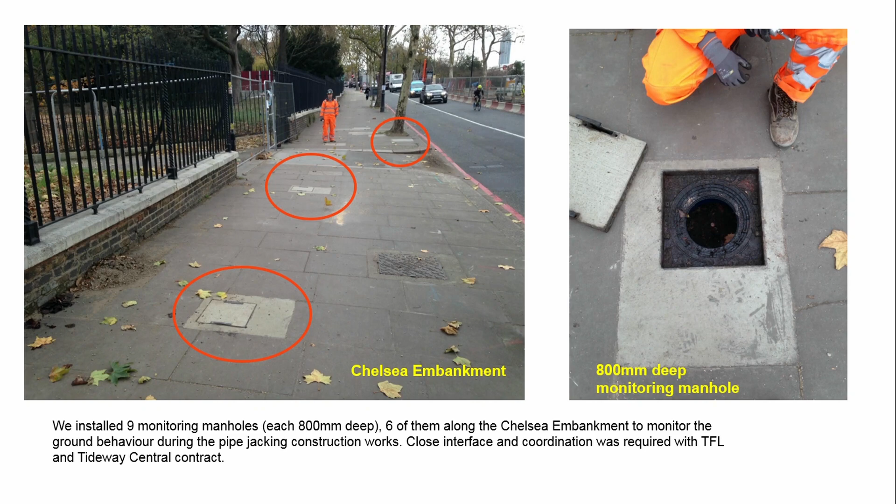Now we have the results from our recordings and measurements. What we're seeing here is our settlements and how they evolve during time and during construction. The first thing we notice is our settlements here during the 22 meters of caisson.

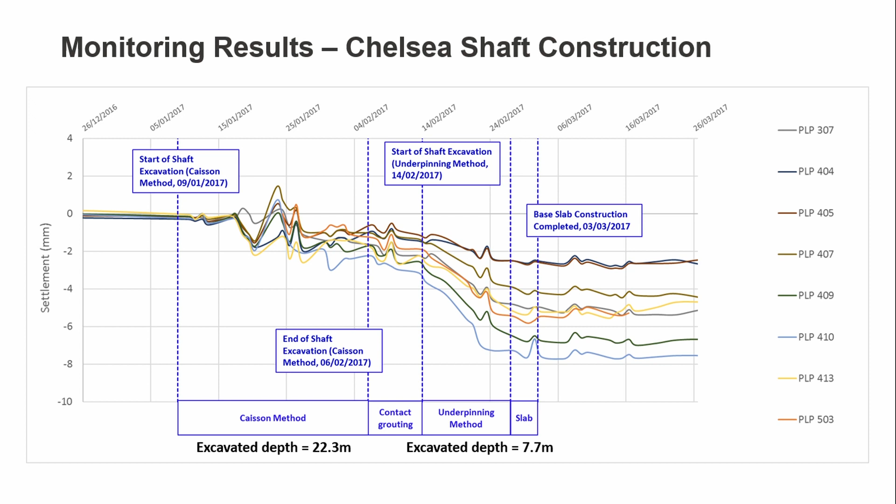This is for the Chelsea shaft, I'm sorry, I didn't mention it. We saw our settlements during the 22 meters of caisson, but as soon as we changed to underpinning, the rate of settlement increased and almost doubled. After pouring the base slab, the settlement seemed to stabilize. Something similar happened at the Battersea shaft: we have our caisson settlements, and when we switch to underpinning, the rate of settlements increases, and again after pouring the base slab, settlement seems to stabilize.

So what we can conclude from these measurements is that the construction methodology actually plays a part in the magnitude of our settlements.

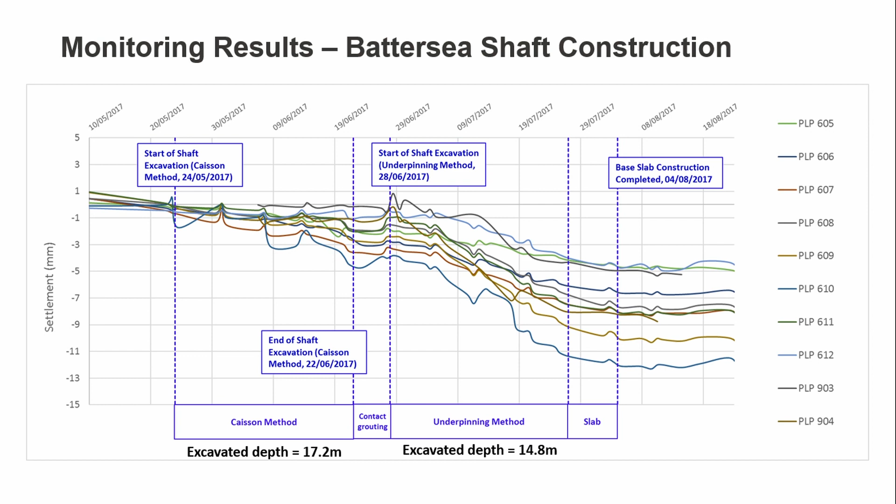For the Battersea shaft, again something similar. This is our prediction, and here the settlements were a bit bigger than for the Chelsea shaft, but again they were smaller than our predictions.

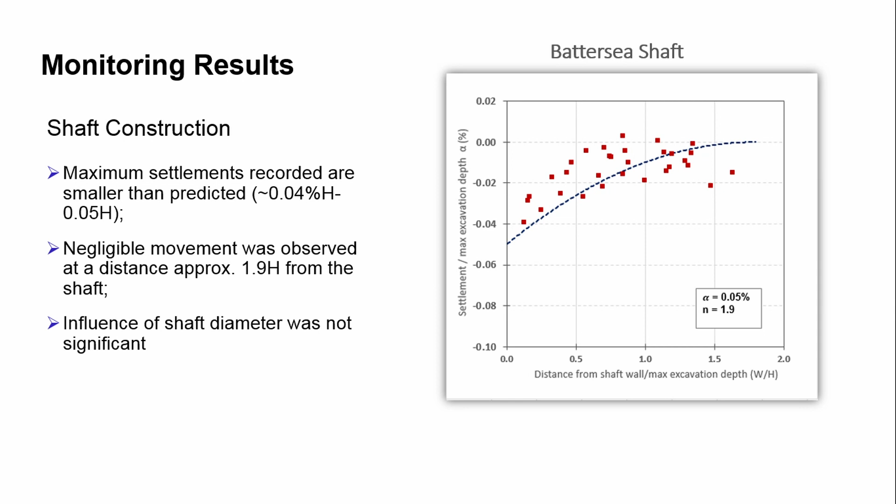The maximum settlements were around 0.05%, and the zone of influence was around 1.9 times the depth of our shaft. Because both shafts were of similar diameter, we couldn't really see the influence of diameter on the settlements. So some research from 2017 and from this year has supported the relationship between the methodology of construction and the settlements.

Essentially what this research suggests is that if you install your lining first and then excavate, your settlements tend to be smaller. This will be the case for example for diaphragm walls or bore piles, where you first install the lining and then excavate.

Instead, if you excavate ahead and then install your lining, which would be the case for underpinning or for SCL, then this data suggests the settlements are actually larger. In the case of the caisson, it's an intermediate case because it depends on how the construction is carried out. So let's see how our data correlates with this research from last year and this year.

What we're seeing here, these two graphs are from a technical note presented in 2017. This data is from precast segments plus SCL, and the difference between this and the original New and Bowers' approach is that a generic equation is suggested, so now it accounts for a wider zone of influence. Immediately we can see that with a wider zone of influence, our measurements correlate better.

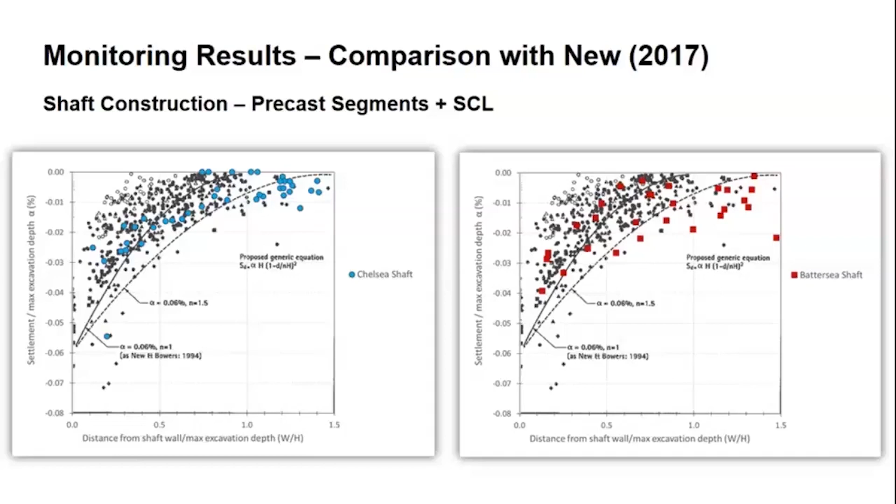However, again we can see that our maximum settlements seem to be smaller than the ones suggested by this method. Here we have some data from Faustin, for diaphragm walls and bore piles, and we can see that now our settlement seems to be larger, so it doesn't quite fit the data presented.

But then we have the caisson methodology. The thing with this data is that during the excavation of this shaft, it was solely caisson, so all of the shaft was excavated by caisson. We can see that in the Chelsea area, for the Chelsea shaft, our data matches or is very much in agreement with this data. And let's remember that around 70% of the Chelsea shaft was excavated by caisson, so I think it makes sense.

But in the Battersea area, we still see that our maximum settlements are much larger. Something I forgot to mention is that all this data also accounts for a larger or wider zone of influence, and that's also something we observe. And finally, there's a mixed methodology: during the superficial stages they use caisson, and then when they arrive at stiffer material, or London clay, they use SCL. We can see that this actually fits better with our measurements.

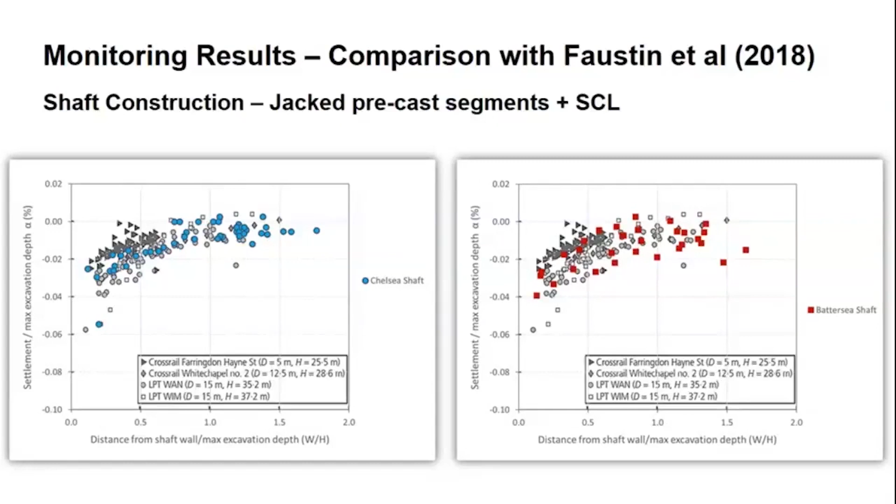Now we go with the tunneling. In this case we conclude one thing: first, our settlements follow an inverted Gaussian distribution, so that was good. Then we back-calculated some volume losses, and we found that the volume losses for the Chelsea shaft were from 1.2% to 2.5% locally, very close to the launch shaft.

We also saw a set of measurements that were very small, close to the Chelsea Embankment river wall, so we think this might be due to the stiffening effect of the river wall. Then for the Battersea area, on the south side of the tunneling, the measurements match quite well with the 2% that we estimated.

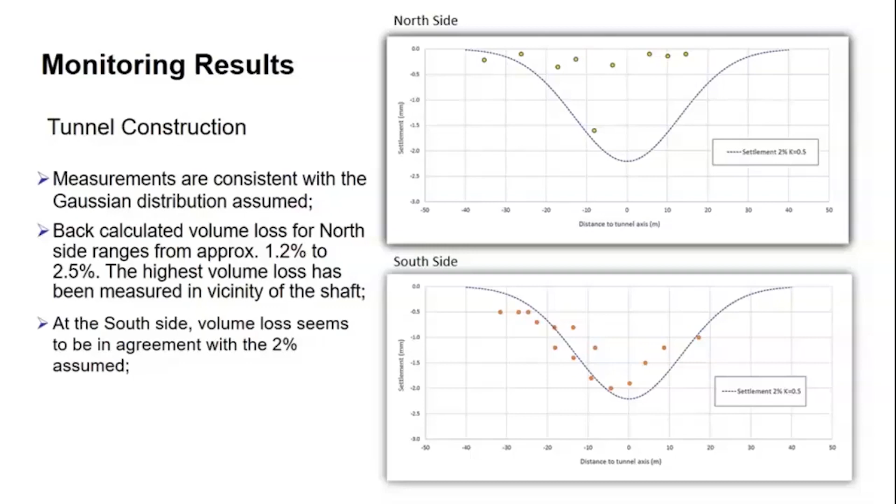In terms of the river walls, for the Chelsea river wall, we visually perceived no impact, so negligible. For the Battersea river wall, we have a longitudinal section and a transverse section. All the data measured by the hydrostatic leveling cells matched our PLPs, but in the case of the tilt meters, we assessed very negligible impact in the longitudinal section, and in the transverse section we only noticed a little bit of movement towards the shaft during the underpinning, but it was really negligible, and the same happened for the tunneling, with very negligible impact.

So the three things we concluded from our monitoring campaign and our impact assessment are that our predictions were reasonable, and the movements during construction were small and didn't cause any impact.

This is only possible when you have good control during construction. The second thing we noticed is the importance of the methodology of construction. Actually, the methodology of construction for shafts plays a part in the magnitude of the settlements you will obtain. And the third thing we concluded is that for pipe jacking, we have some levels of volume losses that for our case were 1.2% and a maximum of 2.5% locally.

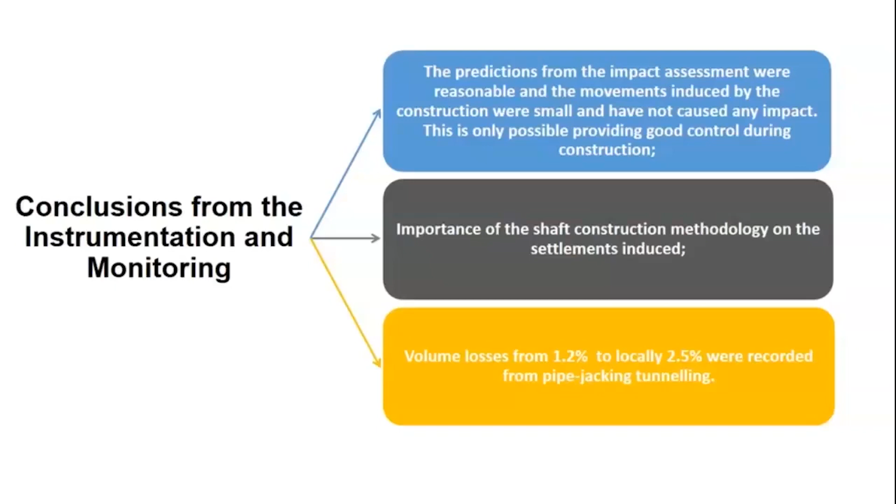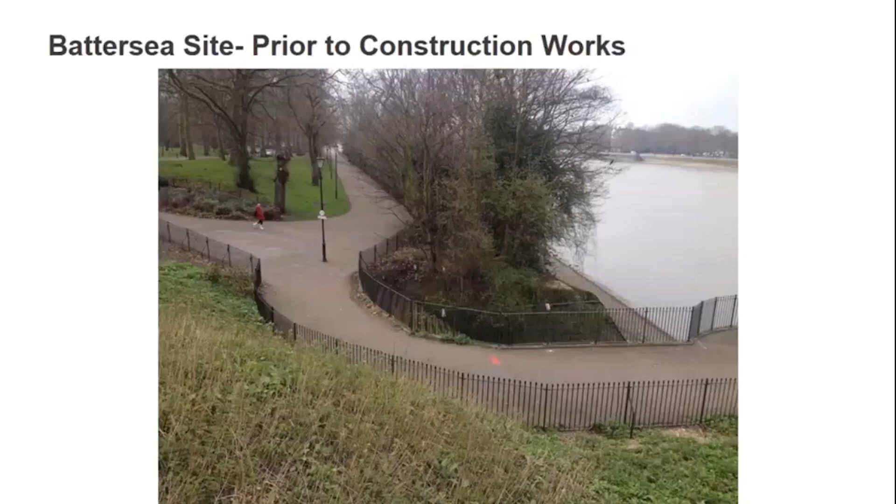Just a final few slides about how we've reinstated Battersea Park. You'll have noticed from earlier pictures that the area where we were working was less than well kept by the park, overgrown with vegetation. Also, the park had concerns about security in this area - they've got a CCTV network and didn't have coverage here. So as part of the agreement to the construction license, we installed a new CCTV camera just off to the side of the picture on the left.

After all the civil works were complete, Barhale reinstated the site back to its original level. We painted all the railings, put everything back, nice layer of topsoil, did a really good job in fact, and resurfaced all the area - you wouldn't be able to tell we'd done anything, to be honest. But what Cadent, as a conscientious company, did as part of the discussions with the park is we agreed to re-landscape as well.

So the landscapers have actually started on site this week. They'll be there for a couple of weeks, if you're in that neck of the woods, pop by and say hello. The planting scheme - we won't see much benefit between now and the spring, but in the spring, hopefully, if the plants don't die off over winter, it will bloom into a lovely, colourful area of the park, and give some betterment back to Londoners and users of Battersea Park.

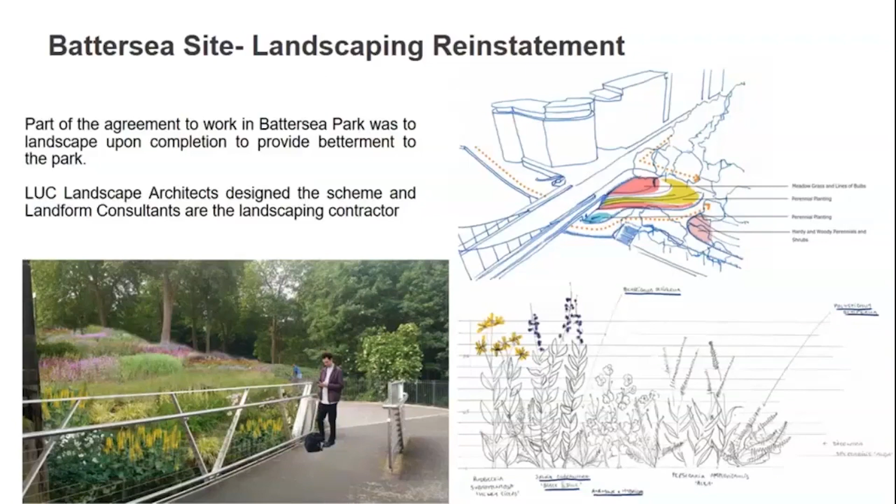So just a few key facts about the project: £17.5 million, same value as the most expensive British car in history, the Aston Martin DBR1. The project overall took 17 months to complete. The civil engineering works, that is the pipeline installation in the tunnel, ran between November '16 and March '18. Amanda is named after Amanda Lord, infirmary manager of the hospital.

330 metres, the tunnel is longer than the Shard is tall. We excavated over 4,500 cubic metres of material, which is equivalent to 30 double-decker buses, and we had zero lost time incidents during the project, which is a really great achievement.

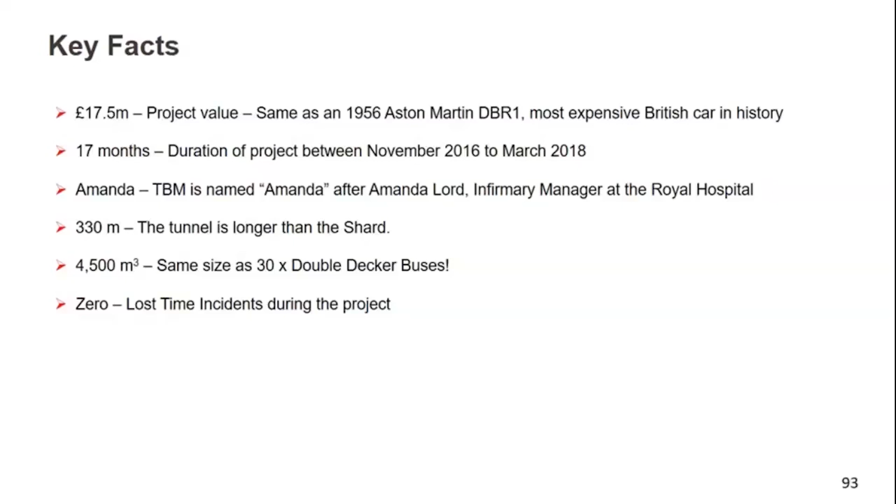So we've now got a short project video, which will come on now.